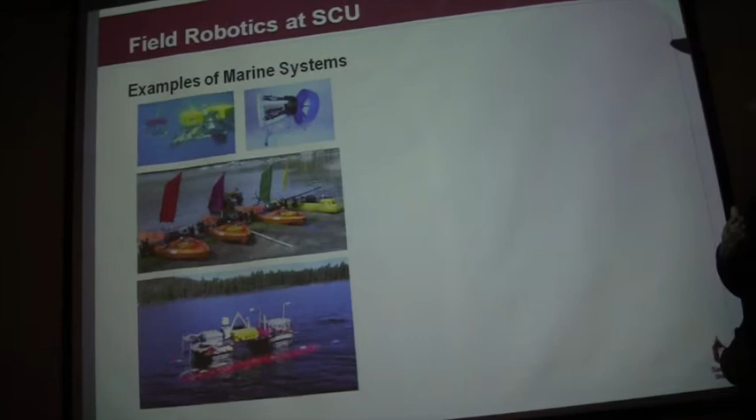Just a few snapshots here—one slide on the marine side, sort of one end of the spectrum, if you will. There's a lot of different kinds of beasts that exist in the marine world in terms of robotic devices, so we have underwater robots, which you can see in the left-hand corner.

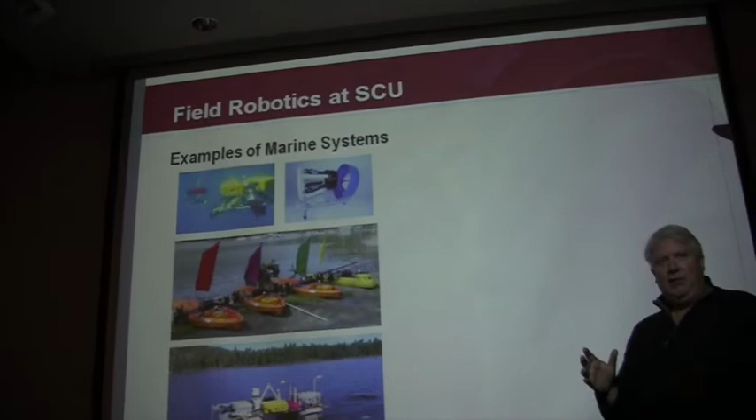You can see these are tethered, with a long tether coming up to a boat where our crew sits. It's very much like a video game, very interactive. The robots have a camera and lights, and there's a display. Usually the display is small, and you're on a rocking boat with students using joysticks. It's like you're driving in a virtual world, and you have a scientist breathing over your shoulder saying 'Follow that fish' or 'Pick up that rock.'

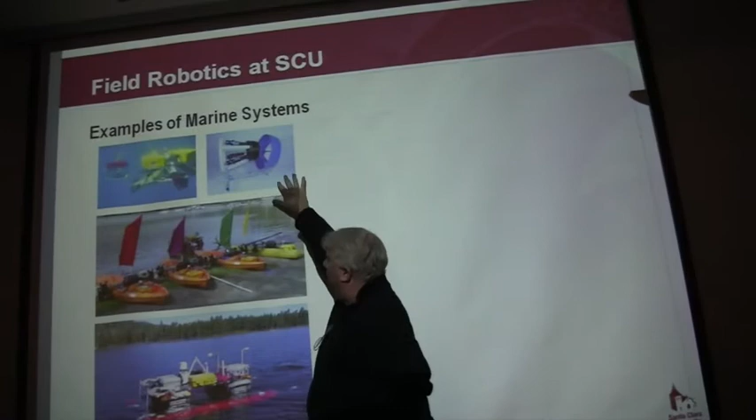Another kind I don't have a picture of is the AUV, which is really what we're specializing in. They're autonomous - they don't have a cable that comes back to the surface, which means you have to program them. You can't just arbitrarily guide them with a joystick. So they tend to look like torpedoes - very hydrodynamic, very energy efficient - and they're automated, and things go wrong on these quite often.

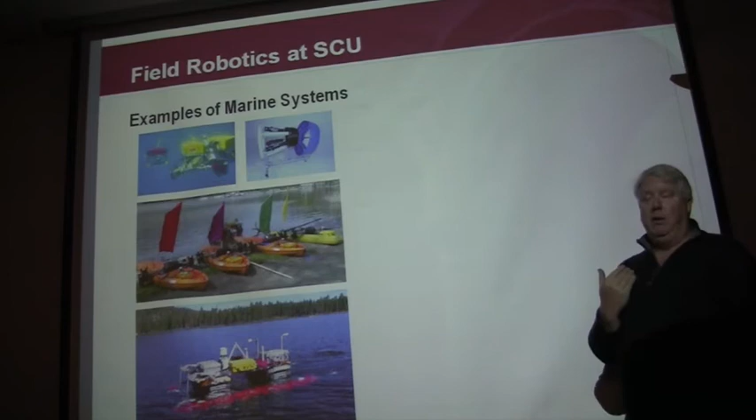So we've been working with Monterey Bay Aquarium Research Institute and NOAA to redesign the standard tail cone that goes onto these, because we're putting these under the ice in the Arctic. If you lose one of your thrusters under there, it's never coming out, and it's easy to lose a couple million dollars that way. So fault tolerance is something we have to learn to design into these robots.

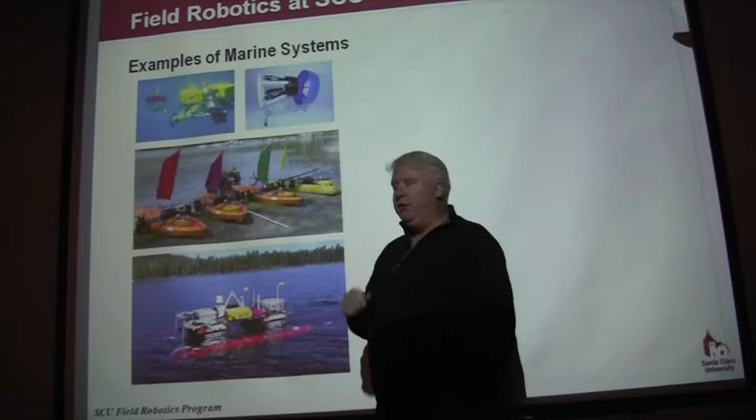We have a little fleet of kayaks, which is all I can afford at this point. But we've got 10 of them, and they go out and do collaborative missions together. I'll talk a little bit about the multi-robot stuff in a few slides.

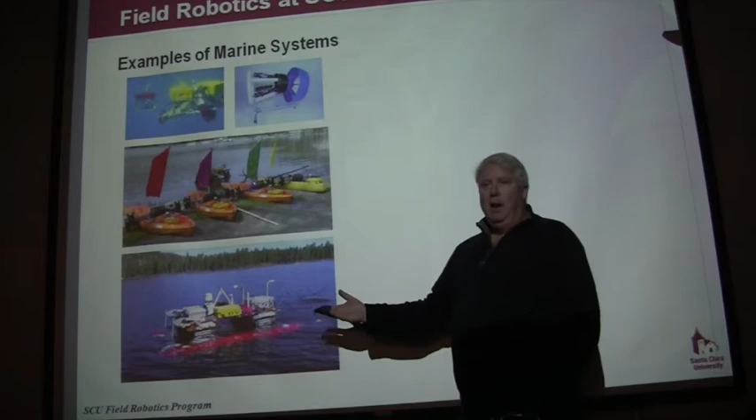This is a weird beast - it looks like a pontoon boat, but you'll notice the pontoons are submerged. This is actually called a swath design. The water line hits the struts, which makes it very, very stable in pitch and roll. We like that because this creates underwater maps - we make topographic maps underwater with a nice sonar mounted up here in this hub. And this runs all day.

So we can tell it an area to map, and it figures out its path - we say it mows the lawn, just going back and forth all day. It's incredibly boring, which is why we want to automate it. If it works well, we're sitting over here enjoying ourselves, and when it stops working, we have to come out and pull it back to shore.

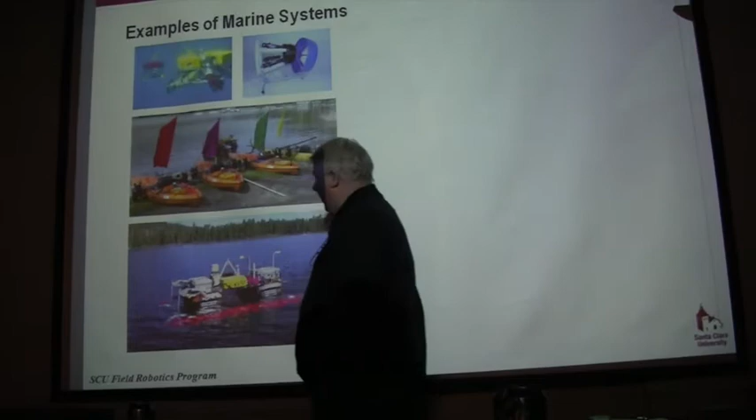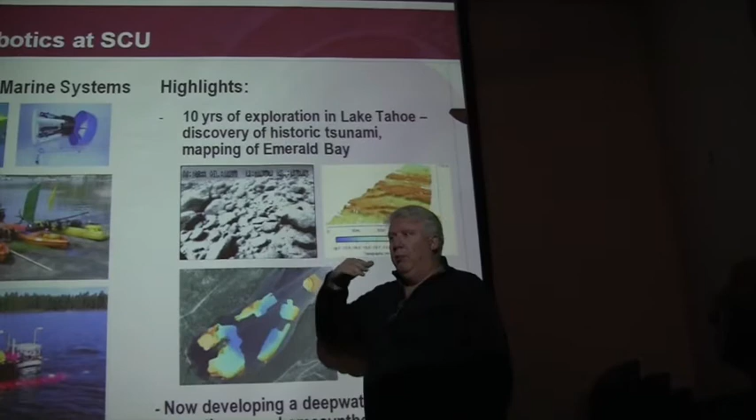Some of the stuff we do with this - a number of years ago we were part of a discovery up in Lake Tahoe of evidence of a tsunami, made with some of the geologists we work with. We saw these boulders that were like ripples in the sand, but ripples from a tsunami wave. These are 50-ton boulders.

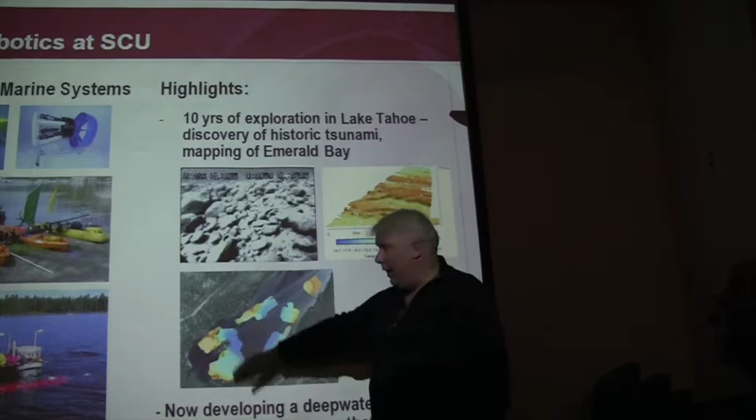We saw them with the yellow robot up there, then went back a couple years later and mapped it with that boat. Here is us trying to put together a map of Emerald Bay over time. This is something they don't have good data on - they have it for the rest of the lake, but it's very hard to get a good mapping boat into Emerald Bay because of the shallow mouth.

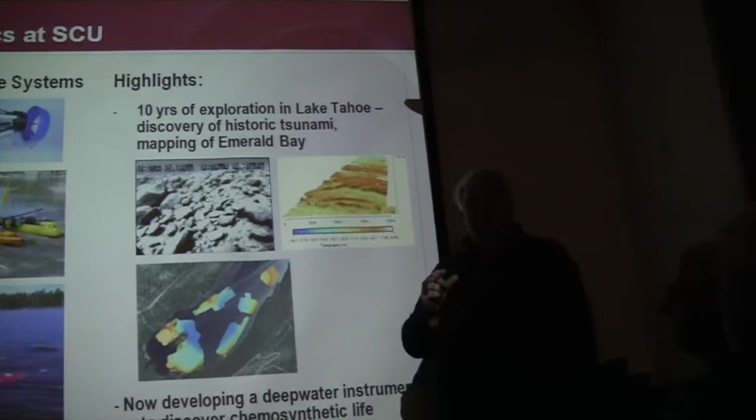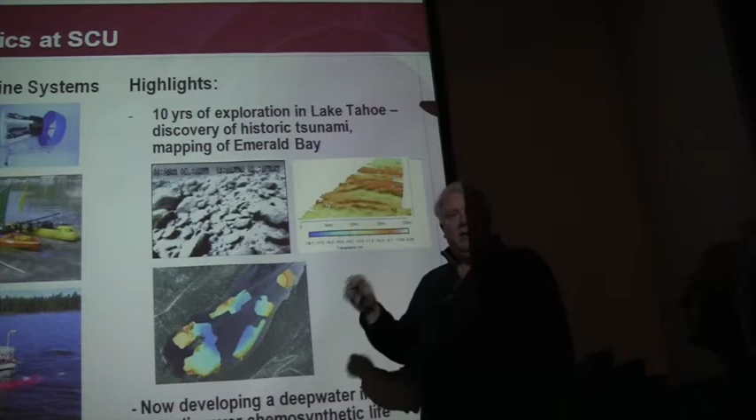But that boat works in about half a meter of water, so we're filling in the blanks, as we say. All the interesting things that go on in the marine world are in the blank spaces on the maps - the first 10 meters right off the coast and shallow waters. That's where a lot of the anthropogenic effects of man on the environment and fisheries tend to occur, so we have kind of a niche there.

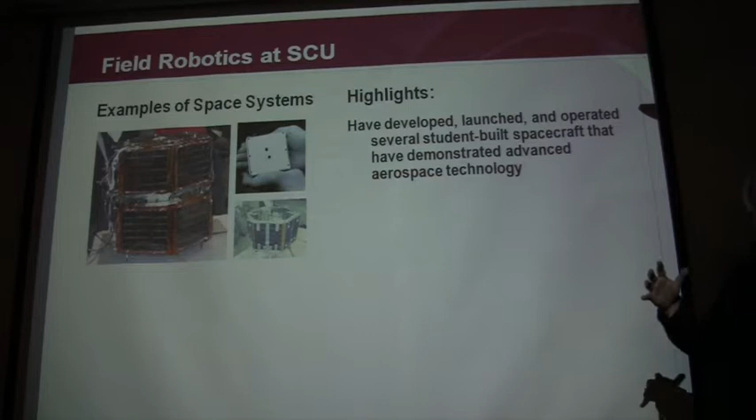Other end of the spectrum - stuff we do in space. Here are a couple examples of satellites my students have built, everything from a hockey-puck sized spacecraft, which you can see in the upper right corner, to larger stuff - sort of computer-monitor sized spacecraft, like before flat panels came out. We've done a number of these, and we continue to do them.

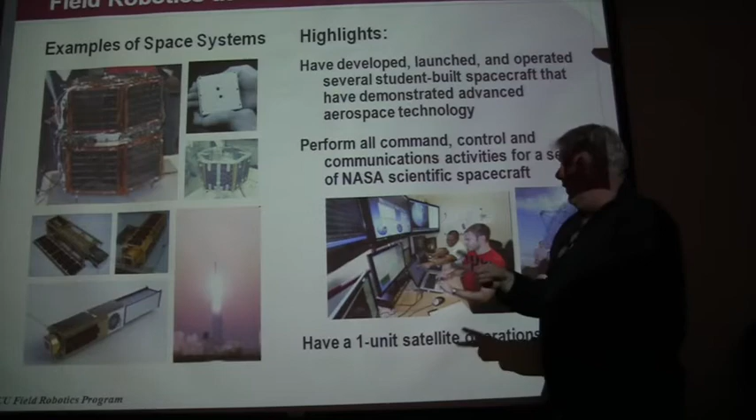And then another flavor of this, the other side of the coin, is we run control systems for a series of NASA spacecraft. These NASA spacecraft are about the size of a loaf of bread. We've been working with NASA Ames Research Center for 10 years now, and we've done 6 missions with them. In some cases, we've actually had a significant role in building the spacecraft, and that's fun too.

But remote control is really what we do. So here's our on-campus mission control center. When you go up 280 and you see the very spectacular dish up by the SRI dish at Stanford, that's not it. This is the dish that would be very spectacular if the big one wasn't there. The big one captures your eye. This is the one you could also see if you weren't staring at the big one.

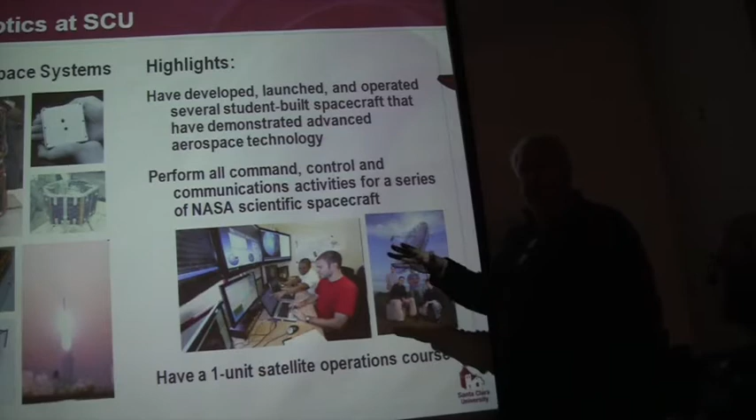So we've used the big one, but this one wasn't working, so we cut it off. This group of students redid it, put it back on, redid the control system, got it up and running, and we started tracking these little satellites with this very large dish. That's an 18-meter dish, and it's actually a gun turret from a Navy vessel.

It turns out that a 3-meter dish works very nicely, and now we have 5 3-meter dishes at various places that we log into through the internet, and we control from this room here on campus. So here's a case where everything on the ground is being done by students, and in fact we have 12 satellites, NASA satellites, launching in the next year. We're doing all these, and we have one actually launching on Tuesday. So it's better this week that I was here than next week.

Where do they launch from? All over the place. Tuesday is going to be out of Wallops Island. We have one going in January. There are going to be 2 going from Kodiak, Alaska, to launch at the same time. There are 2 that are up there now from previous launches that we continue to operate. When I say operate, I mean they have experiments, and the students run the experiments.

They have procedures, they send commands, they get the telemetry back. They check the telemetry for state of health. They take the data products, which is the status of the biology, and do level 0, level 1 calibration and data processing, create them and make them pretty pictures and things like that. Then they send that off to the NASA scientists. So we run the mission itself, and everything on the ground is our responsibility. We own it, we developed it. Our students built it, and we have to maintain it over time.

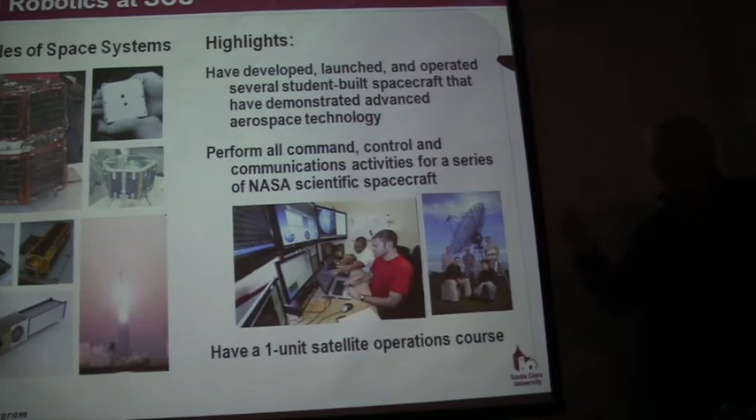Kodiak, and Kodiak is polar. Yeah, they're polar. So 65-ish, and then really where most of the launches are going these days is a space station orbit. And that's very low, very very low Earth orbit. So those tend to deorbit probably in 6 months, 9 months kind of thing. Very short duration, that's right. At about 53-degree inclination. Who provides the launch vehicles?

They get them anywhere they can. Sometimes it's the launch next week is an Air Force vehicle, and sometimes it's a NASA contracted vehicle. The one in January is going to be SpaceX, so it's a commercial launch vehicle. So these are piggybacks — these are all piggybacks, that's right. So they're smaller things. They tend to be put into little ejectors and popped out, things like that.

So anyway, the previous slide was marine, underwater to outer space. So next slide, just a quick framework. The best way I can put together this kind of thing — I need to find a way to do interesting design projects because we're teaching engineering design, and a lot of that's at the undergraduate level. But I have a lot of graduate students, so I need to do engineering research, so there needs to be new and more sophisticated stuff that we do.

And we want to build robots, and we want to take them out in the field, and we need money to do all that. So an ideal situation is somebody has some money to run a mission, and it means good design. The process of figuring out what you need, we develop the mission and build the robot—that's kind of a design process.

But if there's some new technical twist that's necessary that we can't just buy off the shelf and we have to develop it, then maybe some graduate students are involved, and maybe this is a master's thesis or more, and we're developing the technology and we pop that into some subsystem or the way we control the robot. But if we can unify those two things and then go conduct the field operation, the best part is usually they don't pay for the robot.

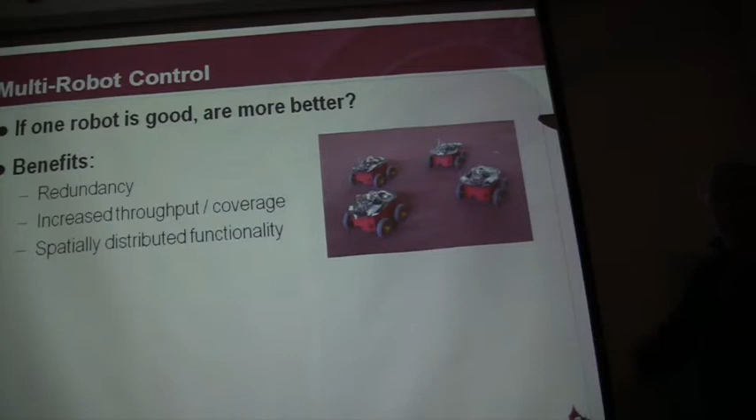But what I'm really interested in is when the robots go out, you don't just divide and conquer, they work together. So the notion of distributing the functionality you need to do a mission across multiple mobile platforms, whatever that happens to be. And maybe they're all the same, but maybe you have a plane and a boat and something that goes on the land, and you exploit all those kinds of capabilities that they bring to bear on whatever your mission is.

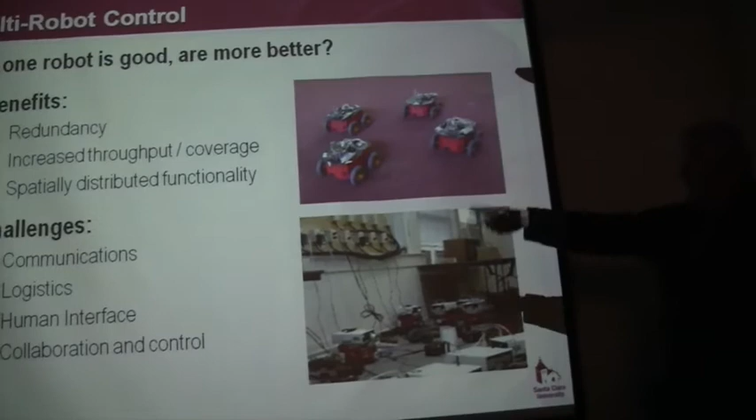That all sounds great, but it's hard to do. That's one reason why you don't see a lot of it. This is us just charging our robots, dealing with the logistics of—well, did you charge that one? I thought you plugged it in—and this is just five robots, and it's a nightmare.

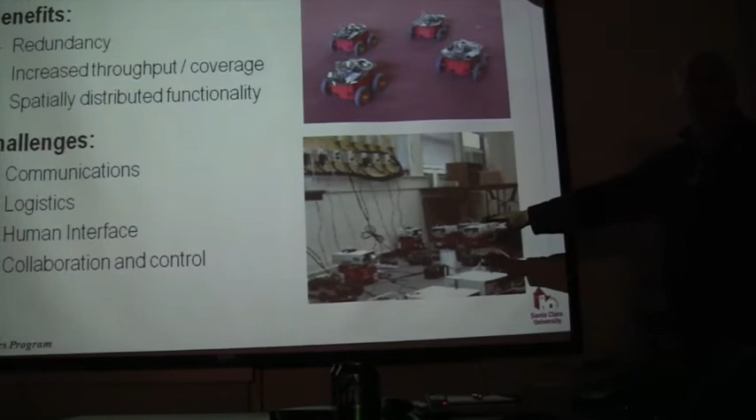So there are a lot of challenges to do this, much less get them working out in the field for 10 minutes at a time so you can get some data.

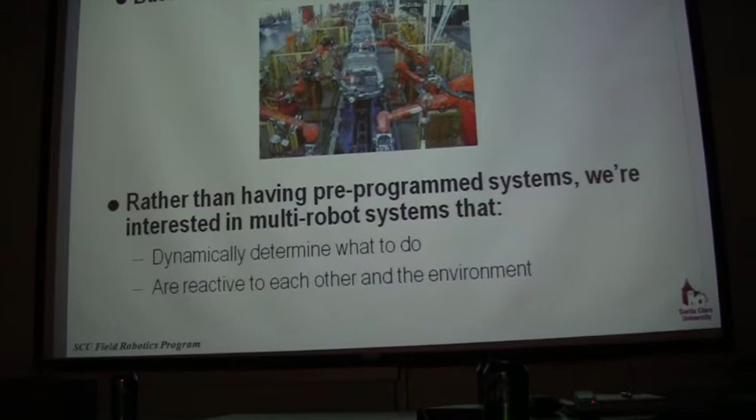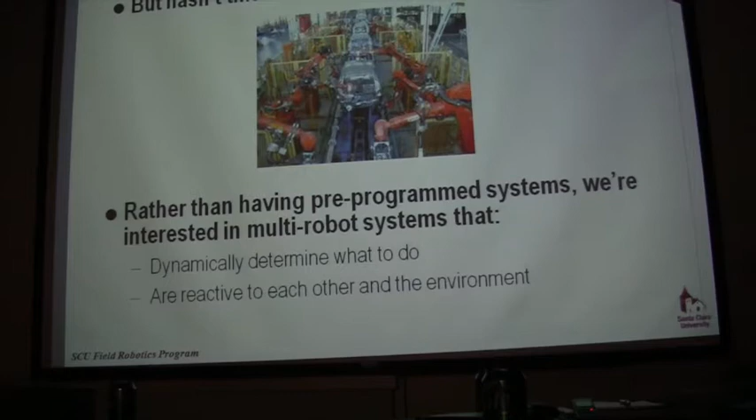So you see, there's certainly cases where robots are quote unquote working together, but these tend to be pre-programmed, centrally synchronized things. And although there is some interesting work being done in an industrial robot environment where this isn't quite the case, a lot of times one robot really has no knowledge of what the other robots are doing. And if one robot breaks down, the other robots, unless told otherwise, would just continue producing product and handing stuff off to the one robot that isn't working anymore. So there's no real-time reactivity among these things.

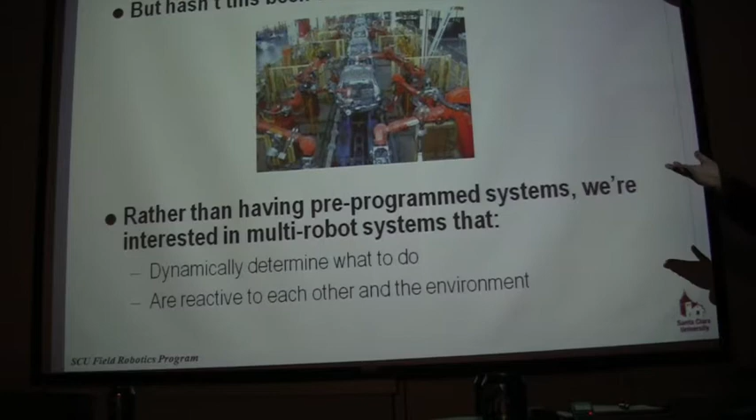So what we're interested in doing is trying to use more than one robot to bring value, but we're really interested in the cases where, in real time, they figure out what they need to do and they can be reactive to each other and to changes in the environment. That's the kind of challenge that interests us, and it interests me intellectually in terms of my research students, and it means we get to build a lot of robots, so that's a lot of design projects.

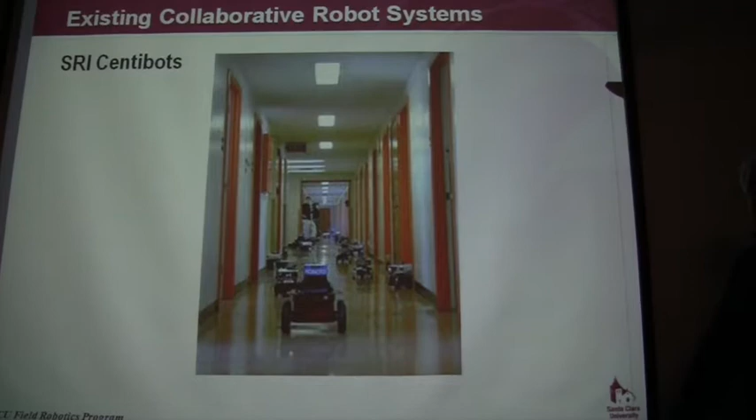There are some interesting previous work out there. This is work done at SRI, and they had 100 robots. They call it Centibots, and they marched down a hallway. But again, this was kind of a divide and conquer. They coordinated to figure out who would go in what room, then they would individually map the room. Then they'd come back at the end and sort of cut and paste their maps together. But the act of mapping was still a one robot kind of activity.

We call those students. Yeah.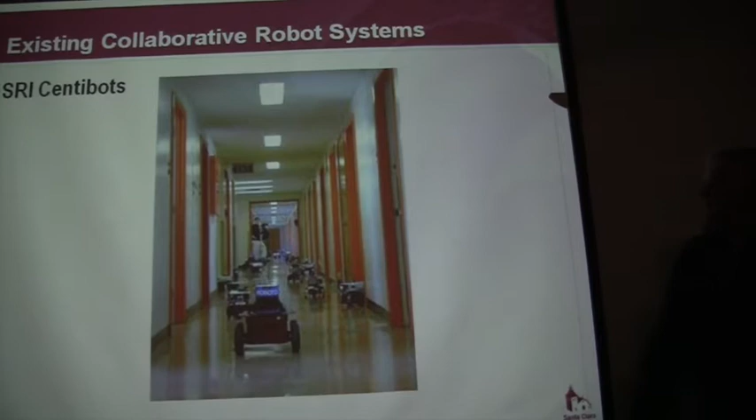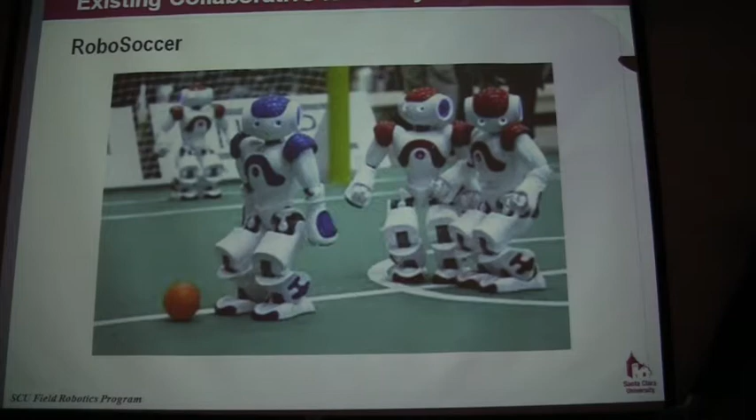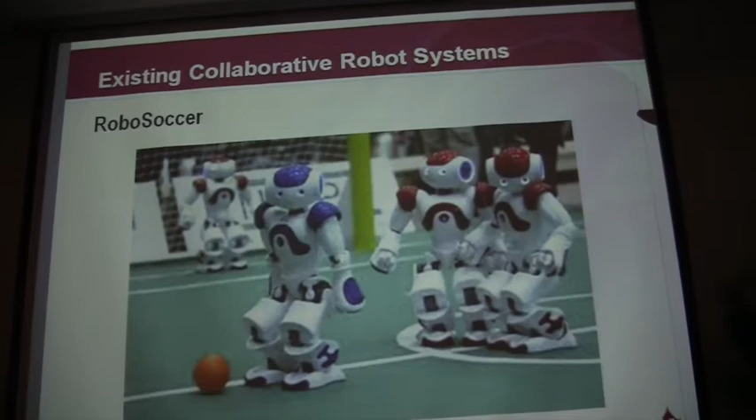Next, really interesting work. I don't know if you've seen Robot Soccer, but you ought to YouTube that. It started off with the Sony Aibo dogs, and then they have land robots, wheeled robots, but now they're using little humanoids, and they go about 5 centimeters per second, so they're pathetically slow, but put it on fast forward and you'll be impressed by what some of them do. This is a competition environment, but a lot of universities are really studying what it means to be a team, to collaborate, and roles in a team environment, trying to understand that and codify it in some sense. That's kind of an interesting thing that's going on.

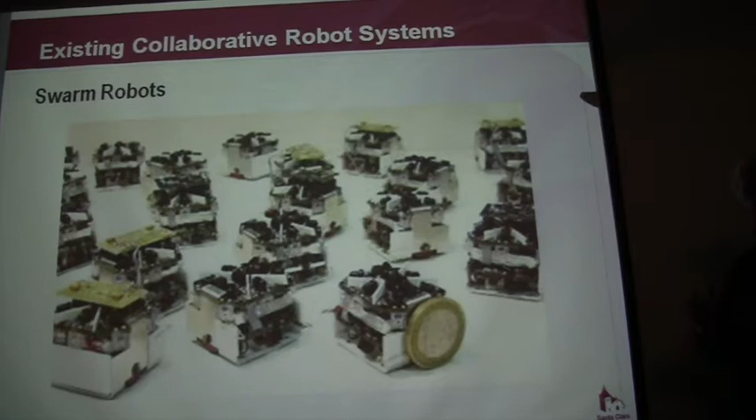Next, another example is swarm robots. I don't consider myself doing swarm robots, and I've got a little bit of heartburn with the term. I think this is beautiful, really interesting work, but the typical thing you hear people do when they talk about this is they'll say, well, we had 100 robots, and they're all very simple, and we're interested in having very simple rules and seeing how they interact to get sort of the collective behavior. And it was great, you wouldn't believe it. We programmed this very simple rule, and you wouldn't believe what happened. Here's what the group wound up doing. That's fantastic, that's very interesting.

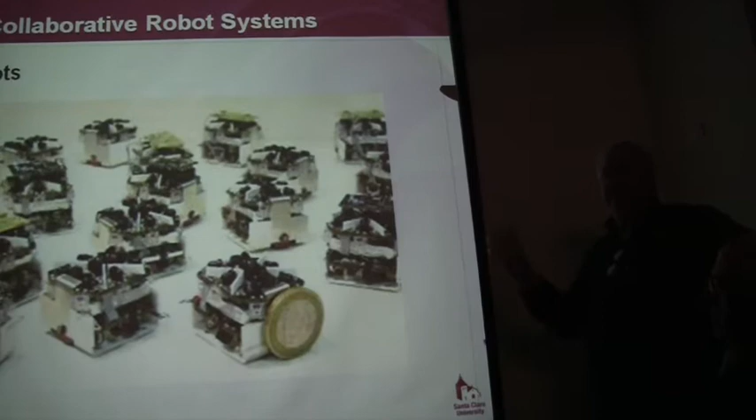But that's the last thing you want in engineering, to not have any idea what's going to happen when it happens. It's science, it's a study of this kind of thing, and I think that's beautiful and wonderful. But the notion that it's largely uncontrolled—really what these people ought to be doing, at least in my opinion, is going backwards. If they would say, here's what I want the collective group to be doing, what is the simple rule, that would be a really fascinating kind of thing. That's an engineering project. Right now it's more in the realm of science, very, very interesting science. I just happen to have a different interest, that's all. I listen to these guys, I watch their videos, I attend their talks, but it's a different kind of problem.

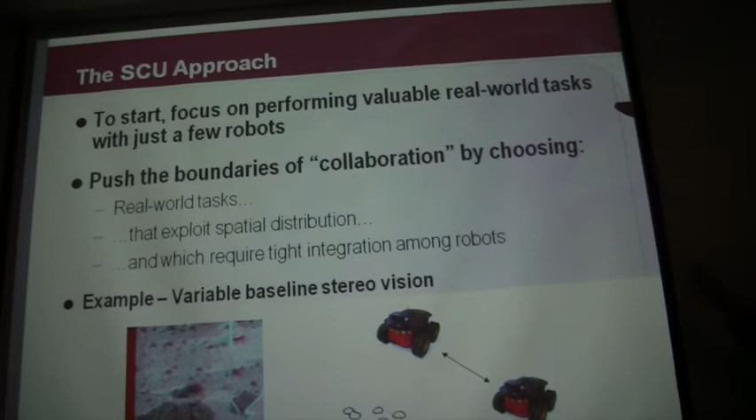So here's the kind of stuff we're doing with the sorts of things you've seen us building. We want to do real-world tasks. We're driven by wanting to get out—I don't want to just spend my time in analysis and simulation. Real-world tasks. I like this idea of multiple robots, and I think the reason you want to do that is you want to do tasks that require a baseline. You want to spread these things out. If you could do everything in a small area, why not just have one big robot? So we're trying to find applications that need spatial distribution and where these things need to tightly interact.

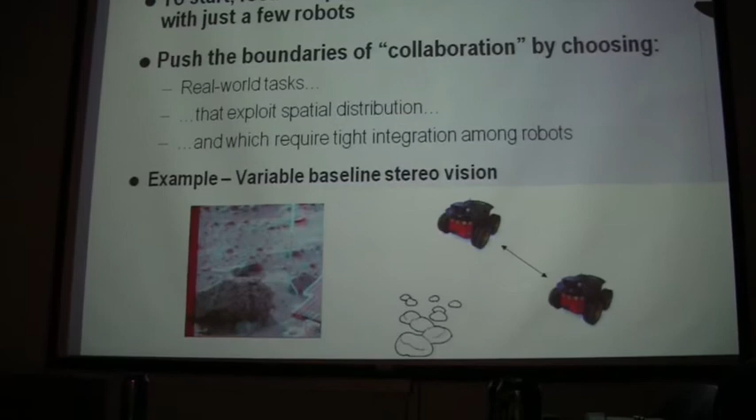If I just say, you go left, I'll go right, we'll individually do our things and come back later, there are a lot of applications where that's a great way to go. I'm just looking for other applications. We have not done this application, but the best simple example I could give you would be imagine doing stereo vision. When you do stereo vision, you have two cameras, usually mounted in one block, about the same distance as your eyes, and you would put them on a single robot. That's the way you normally do it.

I don't know if this is useful in terms of stereo vision or not, but imagine taking the individual cameras and putting them on different robots. Now you could vary the baseline. If that brings value to stereo imaging, this is something that ought to be pursued. I don't do stereo imaging, so I don't know if that brings value, but I think there's some interesting things you can do with it. The point is, the stereo image is the product, and I need to coordinate those two robots in order to properly produce that product. I need to know the baseline, they need to be facing the same locations, they have to work together to figure that out.

So some of the things that we've been working on, we've done some demonstrations in the field, demonstrating some of these capabilities, and a few of them we're starting to get contracts for in order to provide them at a professional level.

So, tracking objects. You can imagine a radar and something flying by and you want to find its location. Well, if I do that for multiple points, first of all I expand my workspace, but if I move them along, I can also find the optimal geometry by which to create the best possible tracking estimate. So that's one. Sparse antenna arrays.

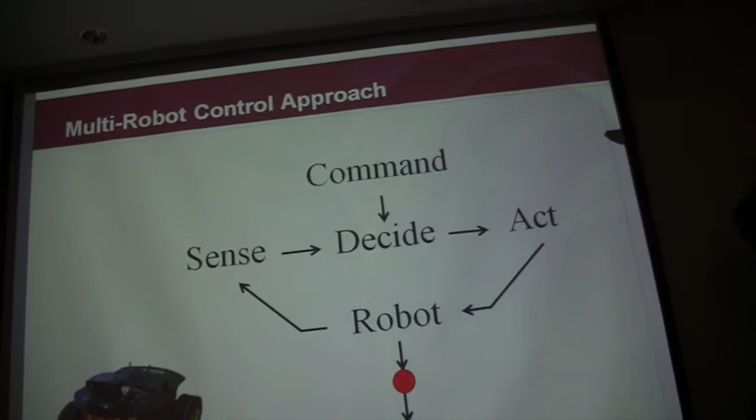Next slide. Just in terms of the architecture, closed loop control, for those of you who know anything about it: the notion of you sense something, you decide what to do. Maybe what you sensed is you're not at the altitude you want to fly, and so you take action.

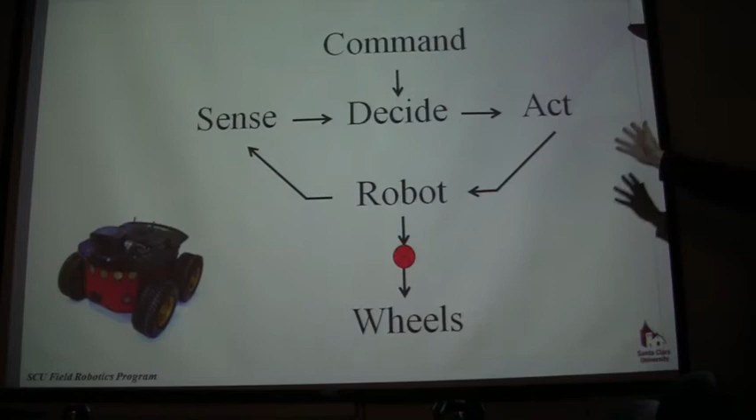So in a wheeled robot you might say, I want to go a certain direction, where do I need to turn my motors. You actually turn the motors and the wheels run, and your robot is now driving to where it needs to go — a kind of basic navigation problem.

If you go to the next slide, you can see how we're starting to piece this together. So I may have three parallel versions of these if I'm running a group of three robots. What we try to do, we call that a triangular formation.

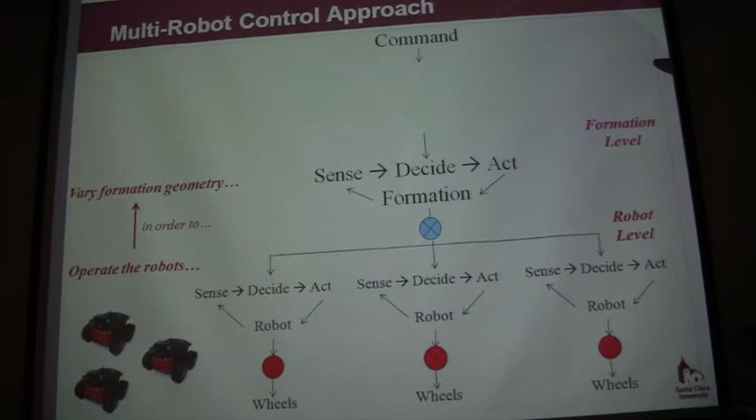We tend to use a geometric representation of this, and we want to say something like: well, I want the geometry, I want the cluster of robots to drive north at 5 miles an hour. I want them to be an equilateral triangle with an edge of 10 meters, and I want them to spin at the same time.

And we call that the Frisbee maneuver. So the cluster goes and they rotate as it goes. It's very easy for me to state that at a geometric level, but what the robots do is actually pretty complicated, and what the wheels on the robots do is very complicated. But math gives you all that.

Okay, so we have mathematical transforms. If I say what I want at a high level, geometrically what happens, I can derive what the wheels do, and I can do that in real time, and if any of them are a little too slow, the others can compensate for it. Okay, so they're interacting with each other as they go.

And then we can put another layer on it with the next slide, which is: I don't really care about the geometry, I want the geometry because I want to do an application. Okay, I want to map someplace. And so now we have another mathematical transform that relates the application to the geometry. And so I can say, hey, I want to escort the ship.

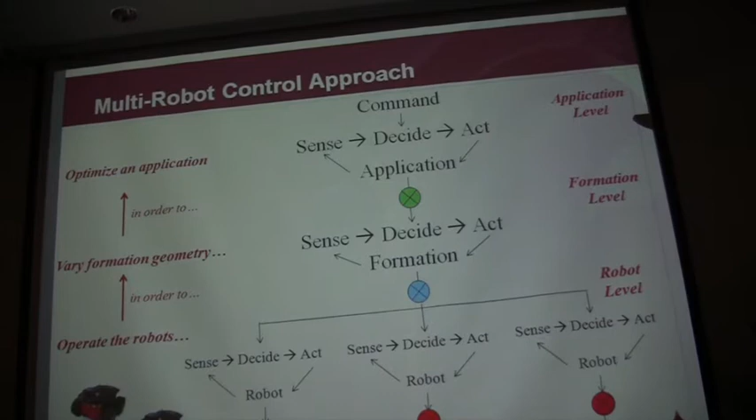And here are the parameters of escorting or protection. Describe it in the language of the application. And I have math that says, therefore, the geometry must do the following. Therefore, the robot must do the following. Therefore, the wheels must do the following. So this is kind of the math that's under the hood of these systems that we're building when we run these experiments.

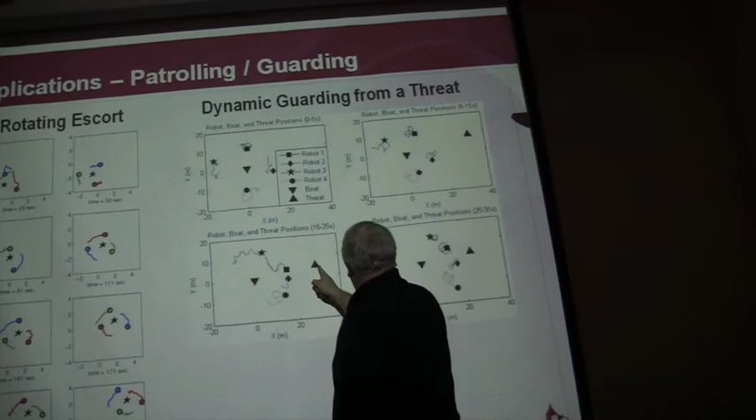The next one, here's data of what we call dynamic guarding. The idea here is I'm protecting this, and you can see in this case 4 robots around it, just kind of hovering. We didn't say patrol, we just said maintain position, so they're staying in their position. Then here comes a threat, and the threat gets close, these guys move over and create a wall as the threat gets close. They establish a wall, and then when this moves away, they circle back around.

A fairly complicated maneuver in terms of what you have to tell the robots to do, but you can easily explain from an application perspective what you want: surround the robot, if something comes close, bring everybody together, form a wall, stay between the target and what you're trying to protect and where the threat is, and when the threat goes away, go back to your normal position. And the next slide is here's what we actually did.

We took that mapping boat, because we were creating maps up in Lake Tahoe, and the last thing you want is someone charging it with a speedboat. In Emerald Bay, that's exactly what happens—anything interesting in Emerald Bay, boaters will approach it at very high speed. So then we decided, well, we put a dive flag up, which says stay away. And it turns out that attracts them faster.

And so then we put signs on it that said scientific instrumentation, even faster. Okay, at some point we're going to put radioactive kinds of warnings on it.

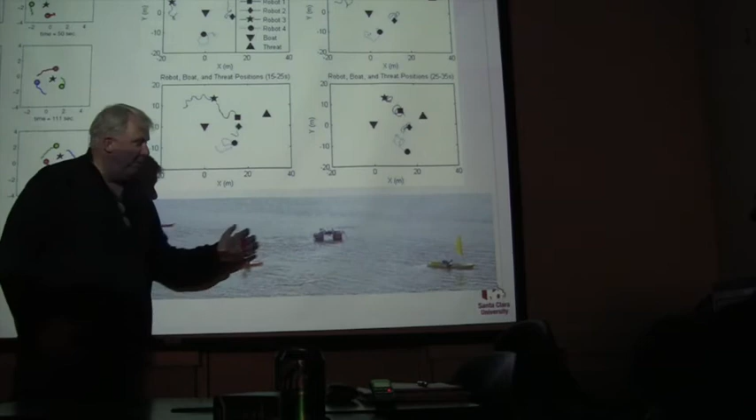What we did was kind of interesting for us because we never thought we were going to do this. We had one project which was build some interesting thing that sort of cost effectively made maps. But we don't want big waves right next to this. And so we wound up using a whole other project, a different group of students in the lab, and said, well, why don't we protect our own asset?

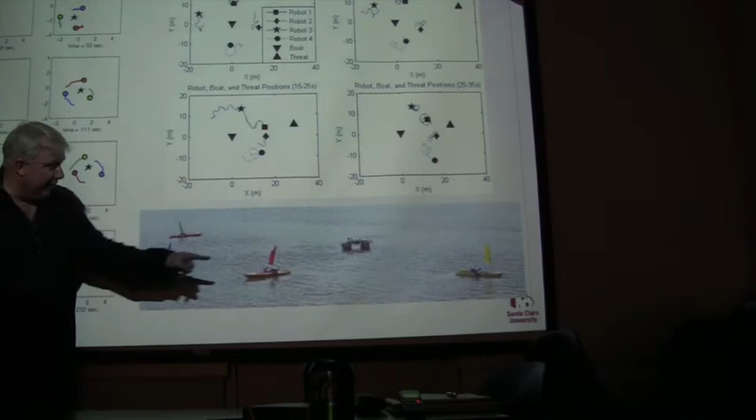And here you can see they've actually kind of come over to one side because there's a speedboat sitting over here. And when the speedboat sees the kayak sort of coming at them, they actually will slow down. So the closer they get, the tighter these things get. Now, at some point, the speedboat could outmaneuver the kayaks and we'll lose. But it was an interesting way to combine two completely different directions in our lab to actually bring ourselves benefits so that we had a stable platform to create the maps.

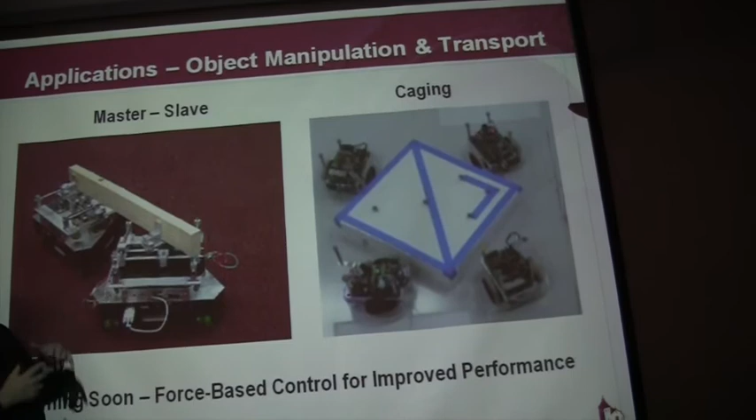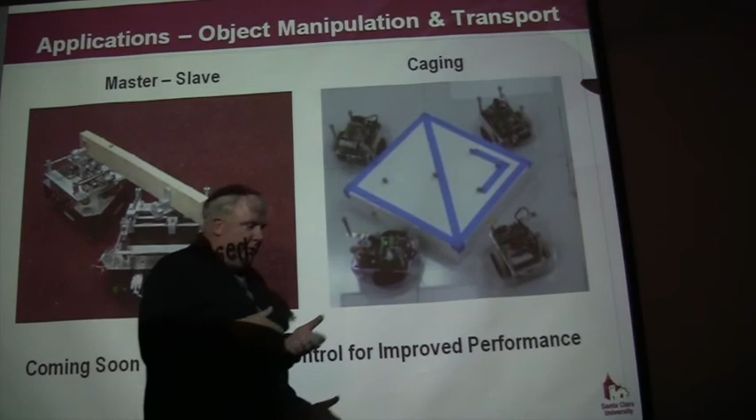Next slide. So we're doing things with transport. What does it mean to collaboratively or cooperatively move an object? I'm not sure what it means, but I think at the very least it means you don't break the object as you move it. If the two robots are just kind of going on their own, it's very possible that you're going to have big forces or torques in the object.

So this was an example of moving the object, and there was no force or torque or strain implied on the object. And in fact, they did the frisbee maneuver. We said carry the object down the hall and rotate as you go, and have no forces or torques implied on the object other than to transport it.

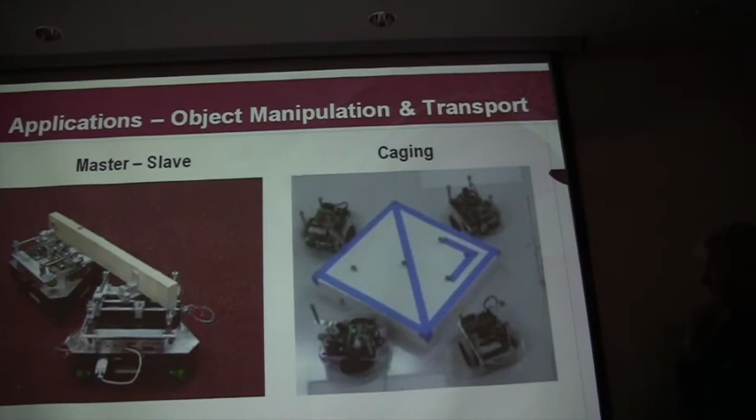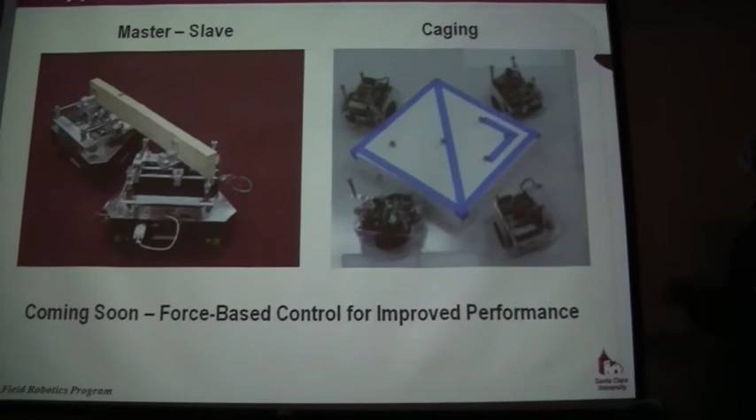Here's a case where for little tiny bots, that's just a piece of styrofoam on a whiteboard. We always start out in sim, then we move to tabletop robots, and we do sort of parking lot robots until we go out in the field. If you go out in the field with the boats, or you're on a satellite mission, then the money and the resources and the time goes up. So we want to make sure our control techniques work.

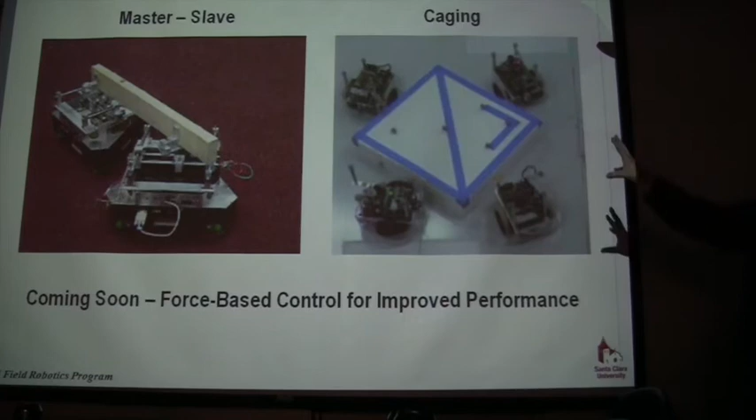So we start off in the lab, and here's a case of these four things. Moving that around without rotating it, and then also rotating it as they did it. Again, this is us trying to learn what it means to manipulate and transport objects using more than one robot in a smart way where they're talking to each other while they do it.

Next one. This is kind of the last example. This is one that we had some really nice experimental data up in Lake Tahoe. We keep going back to Lake Tahoe. It's just really tough duty. We may be taking this technique. We have some meetings in January down to the Gulf for sniffing out oil spills.

So the concept here is imagine something, so some parameter. If you read our very esoteric journal articles, we speak in very general language, like a scalar field. But imagine an oil spill, okay? And the concentration level is high here, and you can sort of imagine these as being contour lines. So this could be oil, or it could be anything of interest that I could put a sensor at a location and measure. A contaminant in general, whatever you care about.

Thermal gradients. And so the idea here is, can we just drop a couple robots in and say, go find the source of the pollutant, or go find the high spot, or the low spot, or go to a concentration level and trace out the concentration level, because maybe that's the danger level. And in fact, maybe have a bunch of them follow each other, and you set up a perimeter for guarding, and you say, here's the perimeter of the safety zone.

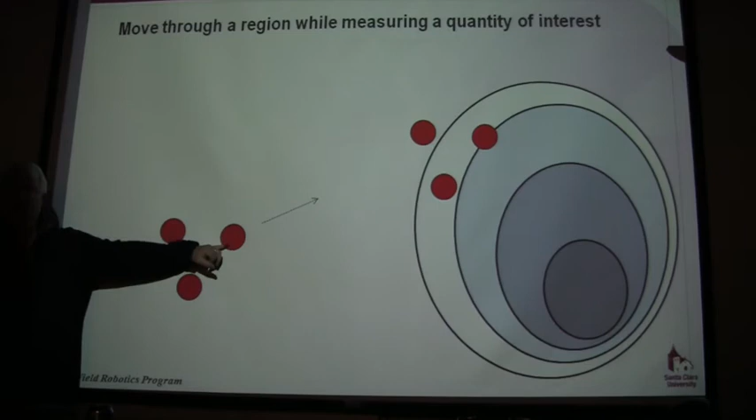So this is a great example, because you need to be able to sense across the field in order to figure out how to do this. And so the idea is, we drop these robots in, and we don't know where, or if there even is anything of interest out there, and we say, just go in some direction, and they're all sniffing for oil, or the contaminant, or whatever they're looking for. And they're all exchanging this data.

And right now they're all saying, well, I have nothing, okay, plus or minus a little bit of noise. And at some point, this guy says, well, I still have nothing. This guy says, well, I have more than nothing. I've got 10 units. This guy says, I've got kind of 20 units. And they're sharing this data, and they realize, well, it must be somewhere in this direction.

And so they'll turn, and they'll drive, and they'll trace what we call the gradient, the direction of maximum increase. They compute the gradient, and they ultimately drive to the max. And when they get to the max, they just kind of hover there.

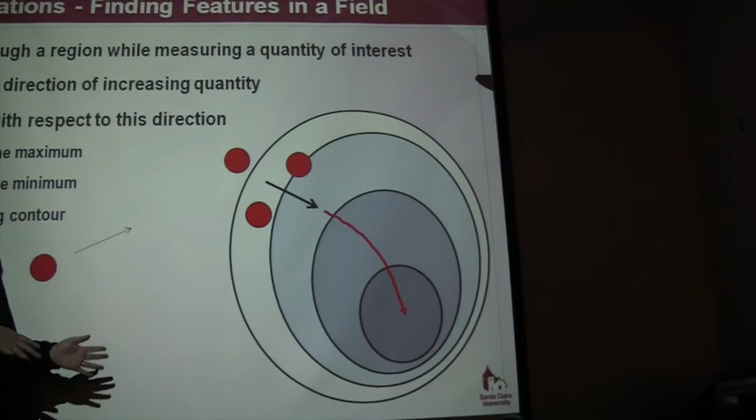And there are a lot of variations on the theme. I can go to the maximum, I can go to the minimum, I can go to a certain level, turn 90 degrees, and track the level. All sorts of really interesting things.

And these have very practical applications, like finding the source of a pollutant, finding the size of the spill, and creating a dynamically changing perimeter for safety to keep people away, all sorts of stuff.

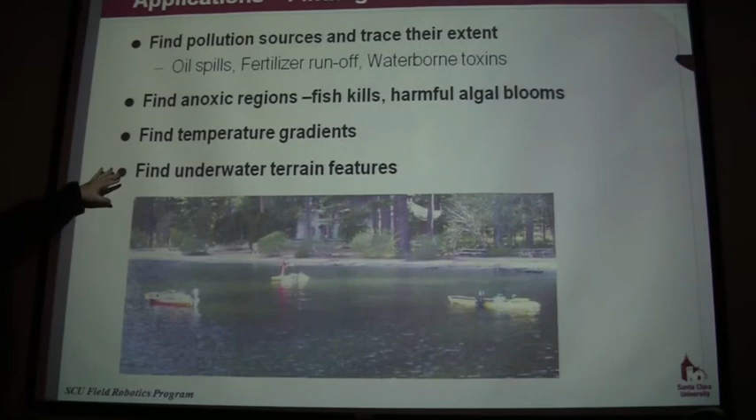So we did this with our kayaks. And we actually did it for our geologists who wanted to find underwater terrain features, which is a different application, but this worked just beautifully.

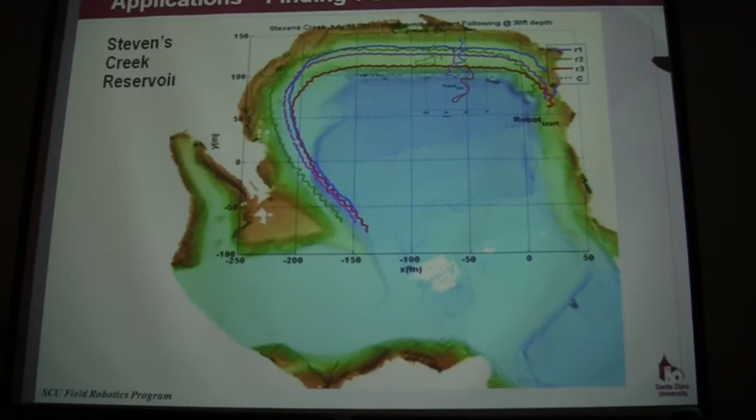So here we had previously mapped Stevens Creek, this is Stevens Creek Reservoir. I don't know if you've seen it now, but the blue starts about here — there's no water left in it. But for those who are familiar, here's the boat ramp.

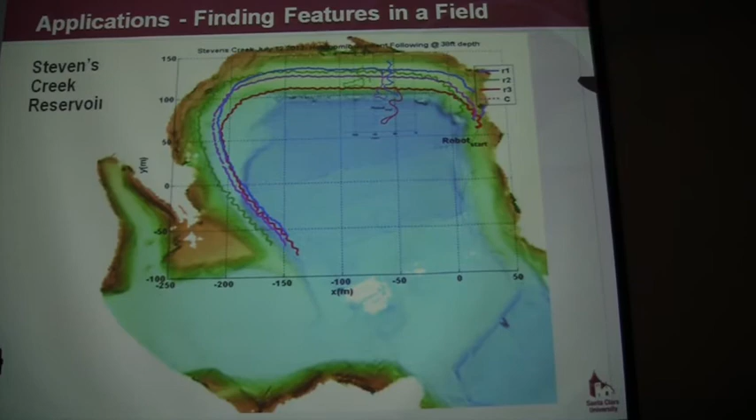When you come off Highway 17, we had already mapped it, so we already knew what the terrain was. In this case, the scalar field was the depth at that point. But this is where we practiced.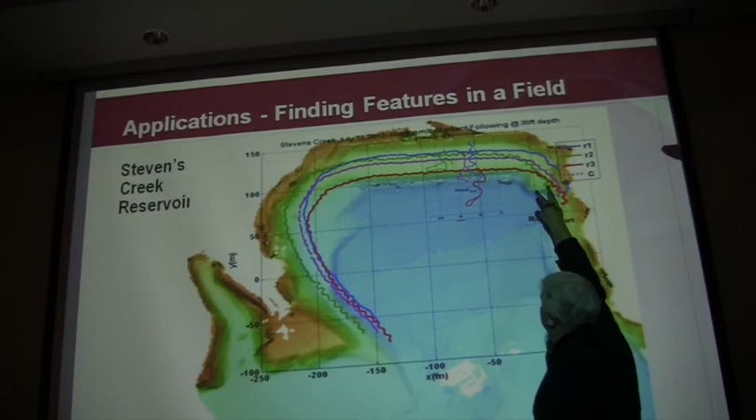So what we did was we went into contour following mode and dropped the kayaks here. We didn't give them any knowledge of the map. We just said, you're going to try and find the average depth of 30 feet or so, and then follow that contour.

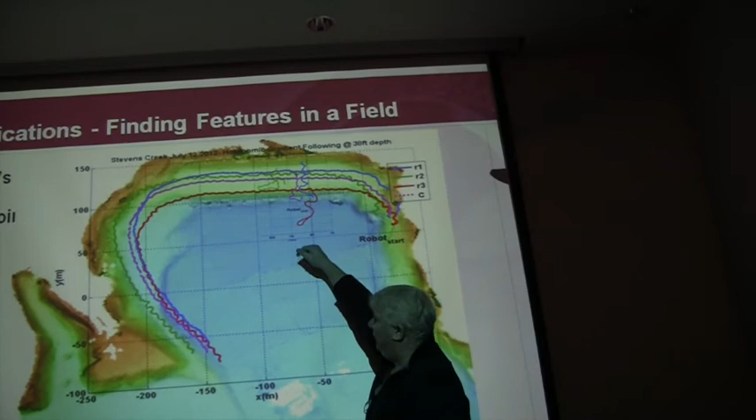And lo and behold, they went all the way around the edge. You can see they're trying to figure it out, but they're talking to each other. Here we told them to go up and down the contour. There just wasn't enough room to really do it well, but they did it. It wasn't really conclusive because it's such a shallow rise.

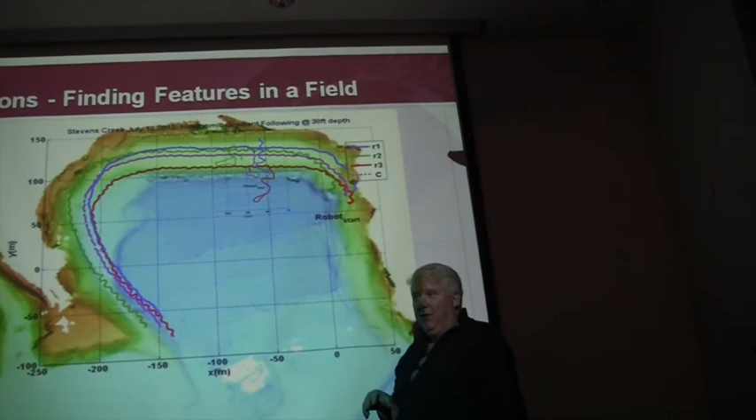But then, once we knew it worked, we went to Lake Tahoe, to an area that we didn't have any mapping data, and we just dropped the kayaks. We said, go down the slope, then picked them up and brought them back, dropped them in again, and said, follow the contour. Then we went in and mapped after the fact and crossed our fingers.

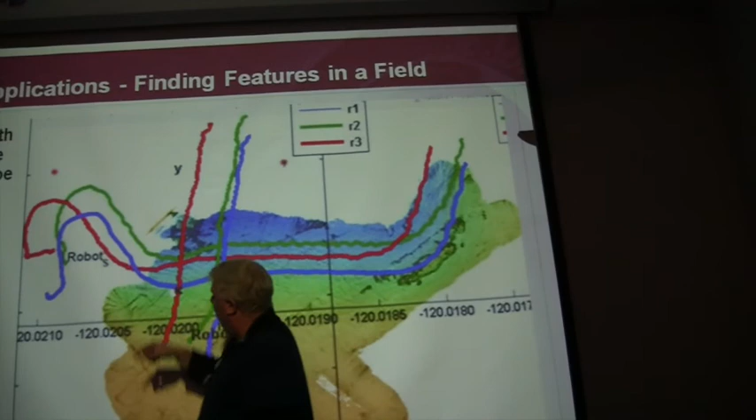Here's where we dropped them in, and we said go down — they petered around a little bit, but headed this direction. Then we picked them up again, brought them over here, and said follow the contour. They did something, and since we hadn't mapped that area, I don't know how long it took them to latch on, but at some point they did.

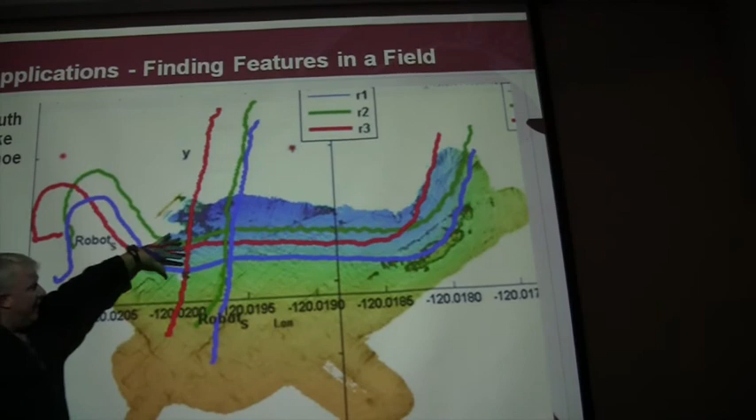Then we went in afterwards and mapped it using our other boat, and lo and behold, they're descending the gradient and following the contour. This was last summer — the first time we're doing this in the field, the messy field, where nothing goes the way it goes in simulation.

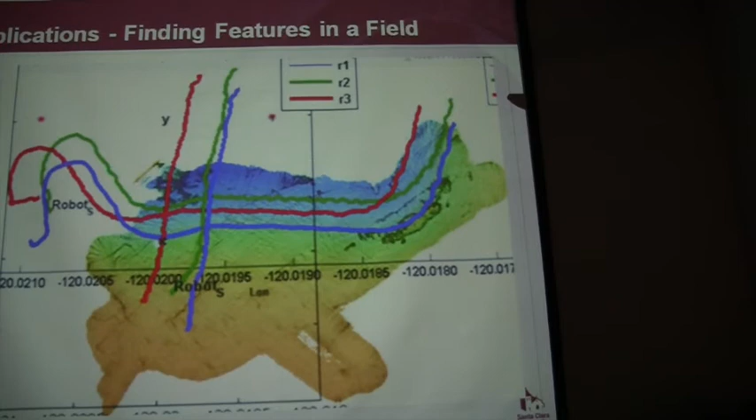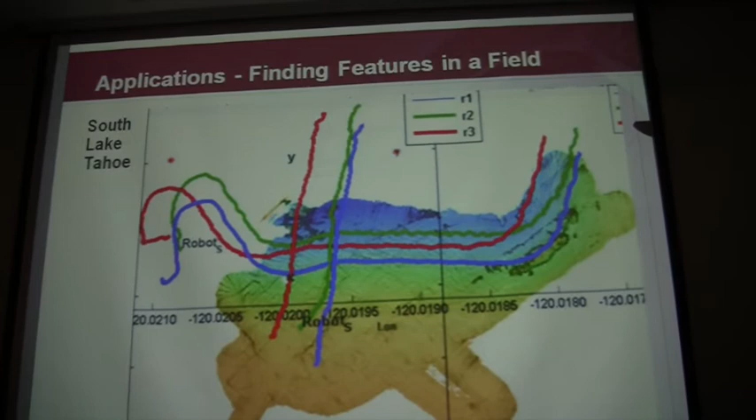And we have a technique now that works, and we're putting different sensors on it — oxygen and nitrogen sensors, because that's how you find anoxic areas in the ocean, which cause fish kills and harmful algae blooms, a big deal. We can put oil sensors on them too. I don't know exactly what that looks like, but that's what we're going out to the Gulf in January to explore with BP, of all the companies.

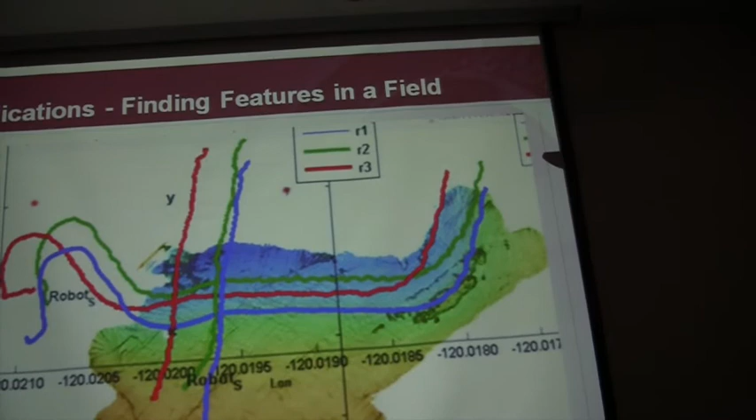We're trying to figure out — we've got this interesting technique, interesting academically, but is there some real benefit we could bring to somebody by turning this loose in some interesting way? We're trying to figure that out now. So what's in the future?

So we're flying quad rotors. We're doing experiments now where we have multiple robots working together, but some are flying, some are on the ground. I have a building out at NASA Ames, which is — for any of you who are ex-military — the old Navy Home and Garden Center. It's been gutted and it's leaking, and there's probably all sorts of carcinogenic substances in the roof and all that kind of stuff.

But it's our building now, so I can brag about it. It's a dirty workspace, and we have an indoor robot play area there, and that's where we're running some of this stuff. Right now it's because it's all really cheap equipment.

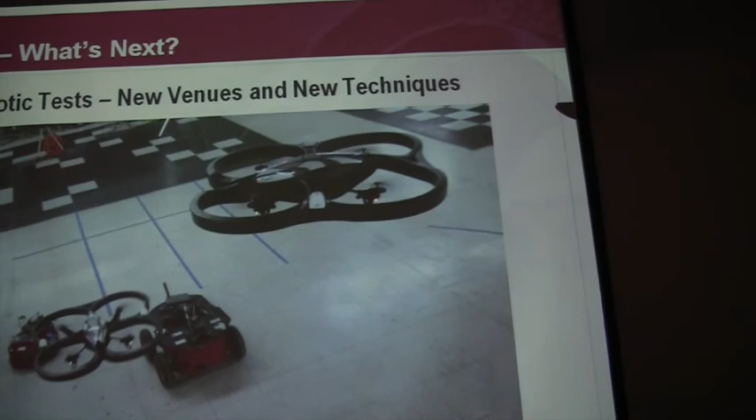These are the little Parrot AR drones that you can get for $300 controlling your iPad, but they're not worth anything outdoors really. So indoors, we're playing with all this, and we have an indoor tracking system that mimics GPS so we can run our experiments and make sure we're good before we go outdoors.

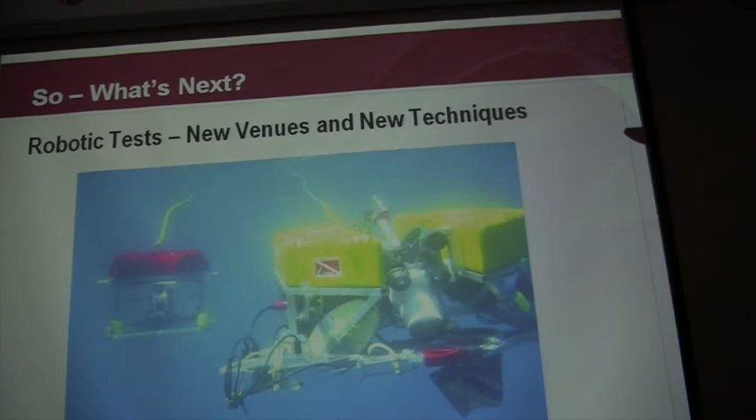Next slide. We're going to take this. We're now doing multi-robot control, spatial geometric control with underwater robots, tethered underwater robots in close work areas. To my knowledge, this has never been done before. This is what you need to have multiple robots work together without 1,000 people on the surface to do things like cap oil wells.

And to reclaim areas on the ground that have just been littered with various things. So we want to do manipulation with more than one robot, and these are robots that we operate professionally.

Next slide. We're going into space. So this is the Spheres platform. We did not build this - MIT and DARPA built these - but these are now available, and we have been offered a test flight with these 3 little bowling ball-sized spacecraft.

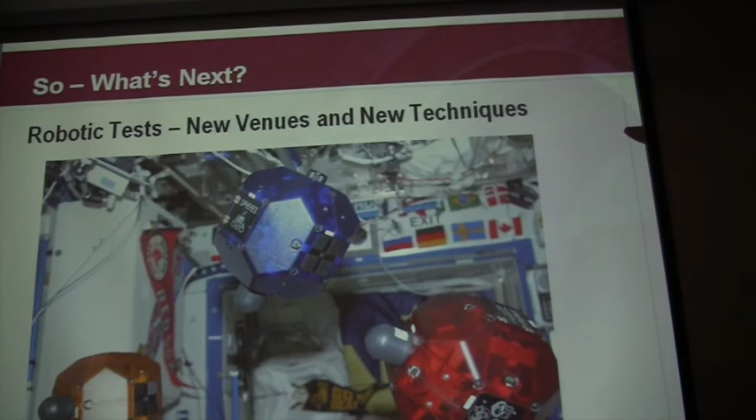This has got to be the most expensive test bed in the world because the astronauts literally hold the robots in their initial conditions at the right locations until you say go, and then they let go. And you have like 2 minutes to fly around and demonstrate your technique. So we've been approved to run an experiment, and it may take 2 years to get there, but this is the direction we're going. We're using the exact same technique on a completely different kind of robot.

Next one. And so we're interested in aircraft, and that's another reason, other than Godfrey telling me I should come and say hi and see what you all are up to - there might be some interesting angles here.

So we have done UAVs for quite some time. We were doing it 10 years ago before the FAA said stop, and we had follow-the-leader kinds of autopilots and things like that. Then they said, we're uncomfortable, we're not sure how to regulate this technology, and so we figured it'd take a year or two for them to figure out what they want, and then we'll be back out flying again. So a decade later, we think there's now a law that says there needs to be another law in 2015 to allow us all to do this.

So I don't know if another law will be passed saying they can delay the first law, but we want to be ready. And when I say that, what I mean is we want to be ready to do the same things we're doing with the marine robots and the satellite stuff with UAVs. We want to support professional class services, whatever that means. I don't know how to do that yet, and we're going to try and figure that out in the next year and a half.

So we want to provide services, but we want to do it in a way that it's interesting design projects so our students learn. If there's an interesting technology twist, then I could get some graduate research. At the very least, I want to have some multi-UAV kinds of things going on because that sustains our multi-robot area of research.

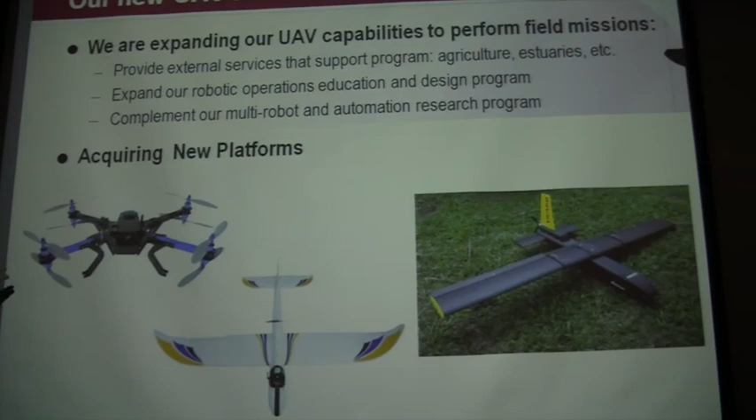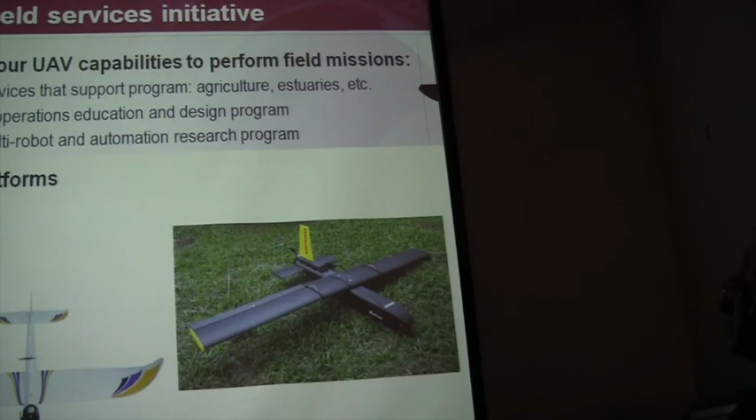Next slide. So to do this, we are now in the process of getting new platforms. We've got some of the Octo 3D Robotics octocopters. We're using the 3D Robotics RU plane just as trainers. We have an order in on a Maja, which is one of the planes out of Conservation Drones that can give you a little more than an hour flight time and more than a kilogram of payload, with the idea we can go out in the field and do more endurance kinds of things. These are all electrically powered.

Next slide. We're getting new payloads. Everybody will have a GoPro attached to their quadcopter. The ones who are into it - maybe some of you have one of the cameras that tags it with GPS metadata, so you can do mosaicing of your photographs - we've got some of these. We're also picking up some FLIR infrared cameras. That's a PathFindIR unit out of the front of a BMW, but that's all I can afford right now - I can't afford the BMW. I can grab the sensor out of this front bumper though, and that just gives you an idea.

What we want to get to is be able to afford some multispectral imagers, and we've got a plan on doing that. But we want to go beyond what a good hobbyist would have, to get some payloads that would get us the ability to get some really unique data products.

How big is that FLIR? That's a couple hundred grams, about that big. It's not what I would want, but it's all I can afford. FLIR has a unit they call the Tau, which is much lighter weight, smaller, and a better sensor. I got it on eBay for about $1,600. Most of them run in the 2,500 to 4,000 range, occasionally you can get a deal. Yeah, I bought a $3,000 FLIR last year for my company.

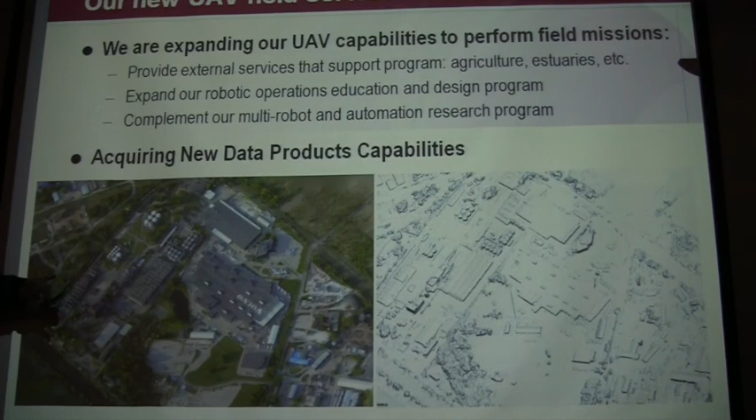So the next slide is the data products. Here's an aerial image, but better yet, this is actually a mosaic of 300 aerial images. And it's not really an image—it's an image that has been applied to a 3D model generated from those 300 images. So this is a CAD model that you can rotate and manipulate, and you can get the digital elevation map, the topographic map, from the aerial imagery, and then put this on top of it, applying it to the elevation map.

So this kind of stuff starts to distinguish us from a hobbyist who's really into it. I'm going to be competing with the guy with the quadcopter and the GoPro who says, I can take a good snapshot for the real estate agent. And that's great. But if we can do GIS certified mapping services using a higher end payload and some really nice software to do the processing, that's going to give us a little bit of advantage and help us figure out where we should fit.

It's going to be a student operation. I want the students doing engineering. I want them running the engineering enterprise so they get all that other stuff too. But there's a limit beyond which we wouldn't go, and I don't know what that limit is for the UAV stuff. But we know what we're good at in the marine world, we know what we're good at in the satellite world, and it'll take a few years, but we'll figure it out for the UAVs as well.

Next slide. So this is what I would say at the end of a talk if I was giving my graduate seminar—that clearly I've demonstrated to you that building automated...